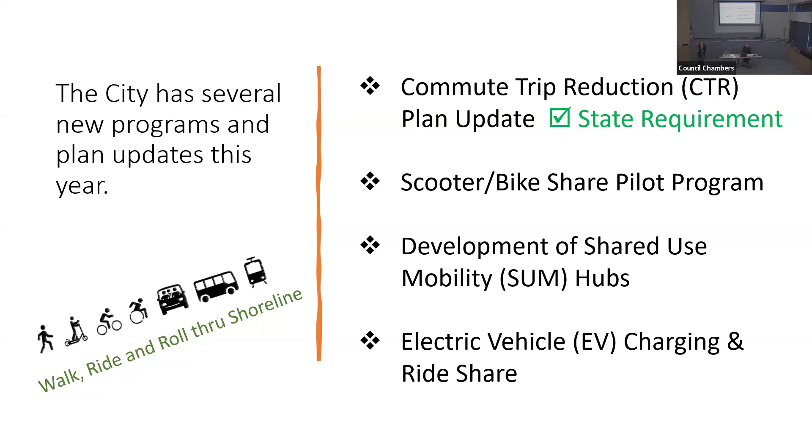We're going to have an open house, I'm going to say this more than once, on June 29th. So that's a save the date, there'll be a slide on that at the end. We're going to have a survey, and we'll have a number of other events and activities that Jeff will be talking about. So I'm going to move into commute trip reduction.

In 1991, we created a state law that was really focused on our employers and encouraging them to have people think about other ways to get to work besides driving alone. This was looking at ways to help with air quality, traffic congestion, and the reduction of petroleum fuels.

Next slide. In the city of Shoreline we have 7 employers with over 100 employees that come to work between 8 and 5, basically. Initially this was really focused on those sites, which are listed here, but they've just updated it and they're now expanding that, so they're asking for even more community involvement.

What could you do? What could we do to help incentivize the city of Shoreline, as well as these employers and others, to provide you with some enticing options besides driving your car alone? There's a survey that we're going to be talking about here in a minute to help encourage getting ideas about what we can do to support that.

Next slide. So right now, our employers, some of them have programs like ORCA cards to support riding the bus or rail. There are options for encouraging carpooling, van pooling, as well as riding your bike or walking. COVID has actually helped a lot with compressed work weeks. We're talking to these employers right now and finding out, do you have showers? Are there bike racks or other things that we could be doing to help encourage that?

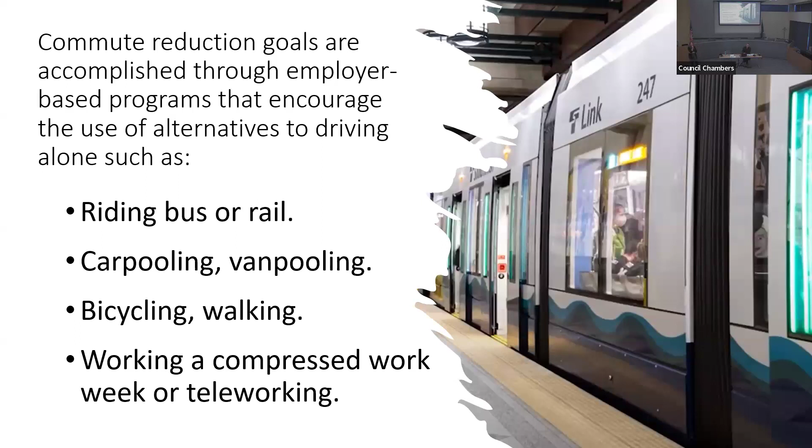Next slide. I think what we're doing in terms of the state asking us to look beyond our 7 employers is for individuals, for residents: what can we do to help look for other things besides driving your car by yourself, because it's not only a benefit for the environment, but it's a benefit for your wallet, it's a benefit for your health. So we call that a triple win, and that's something we'll be trying to promote more. The goal of this program is to have at least 4 out of every 10 commutes by means other than driving alone. We've already done the easy things.

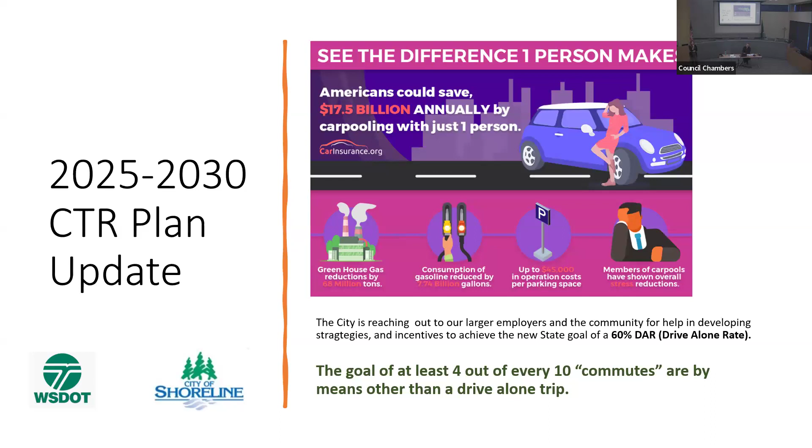So what other things can you help us think of that could help people consider something that isn't as comfortable and convenient as driving by yourself? What are things we could be doing that would help you consider an option that's good for our environment, better for your health, and helps your wallet?

These are goals that also support our climate action plan, which we as a council identified as a climate emergency about a year ago. So the importance of helping people shift from driving alone is being emphasized by our city leadership as well, and we're required to do CTR at affected work sites.

You'll see this QR code advertised on campaign signs we'll be putting around, as well as on our website and other areas. We have a survey that should go live by the end of the month asking the questions I just asked, focused on driving alone and how to look for incentives to consider other options. We also have the June 29th open house date. I think that's it for Commute Trip Reduction.

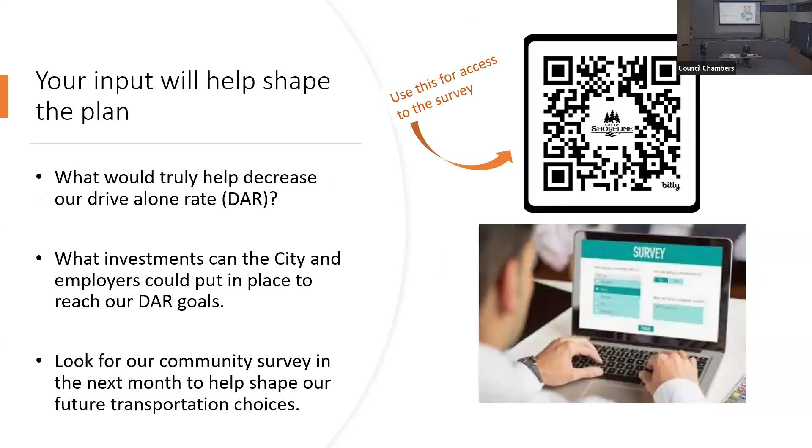I'll turn it over to Jeff to talk about our bike and scooter share. Along with the focus on reducing trips, we want to expand as many travel options as possible in the city.

Light rail is coming to the city, and we're expanding the various travel options we want to test out, one of which is scooter and bike share. If you're not familiar with this, you can rent scooters and bikes by the minute using a smartphone app. There are other ways to rent as well, by phone or online. It's about $6 for a 10-minute ride, but there are discounted rides for those on government assistance.

They need to be parked away from streets and sidewalks, in areas like the landscape strip between the sidewalk and the street, or other areas that don't obstruct people. We're guiding it so that busy areas will have specific designated parking places as much as we can.

We intend to launch this pilot this summer, test it out, and see if it's safe, easily accessed by the community, and actually expands travel options. People are using it to get to transit, to get to work, and for other trips.

There are a number of operators nationally, with three still operating in Seattle: Lime, the green and white bikes; Bird, the blue and gray scooter; and Veo Ride, another option in the Seattle area. We want it to expand from Seattle into our city, but not the full expansion as part of the pilot. So we're capping the amount allowed into the city and observing over the two-year period whether we can expand.

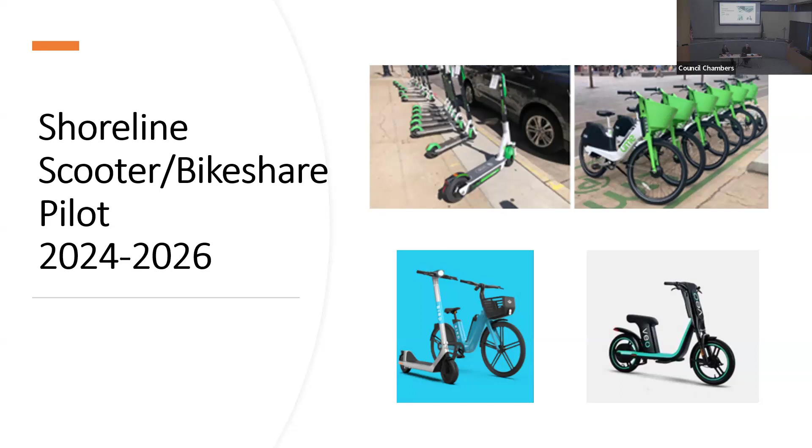This supports broader city goals to reduce greenhouse gases and fulfill the goals of our climate action plan, as well as transportation policies in our comprehensive plan to expand ways to get around.

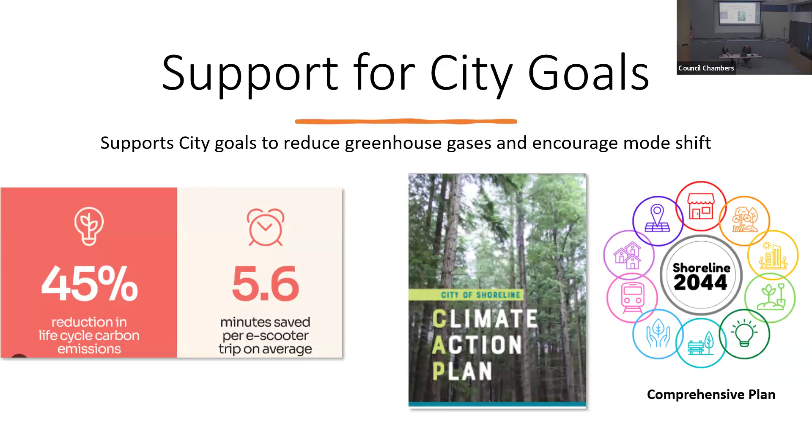The schedule: we are kicking it off now. We're updating the city codes around it to guide what these operators can do and how riders interact with our street network. We're selecting a vendor in the May through June timeframe, and we intend to launch this pilot service in July, possibly into August, timed for the light rail station openings to ensure additional access to the stations.

The two-year pilot allows us to have enough data to inform any future investment, really investigate what works and what does not, and explore whether it's actually expanding travel options for the city. It's based on direction from our city leadership, our city council, and we're working with a number of stakeholders, including police and fire and others at the city beyond just our transportation services division, and of course, the public.

We want it to be informed by the survey that's being launched. We intend to go out to the community with summer events in June and July in particular, and have some focus groups in different languages engaged around the Walk, Ride, Roll campaign. There will be regular review for safety and community response, making sure the operator is responding to any concerns the community has as it goes forward, and other considerations.

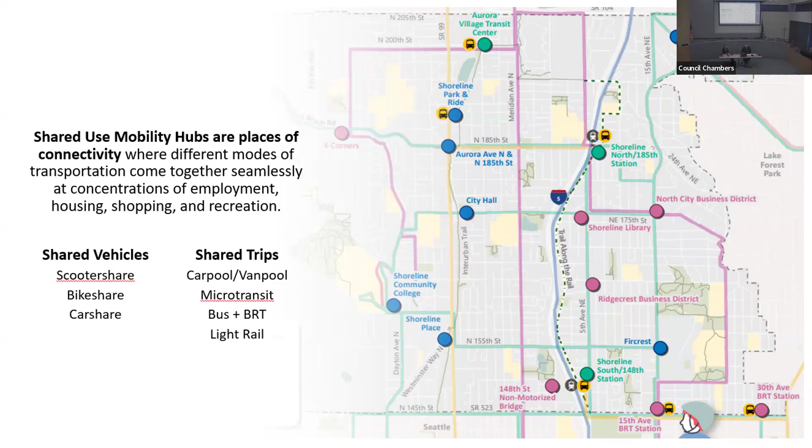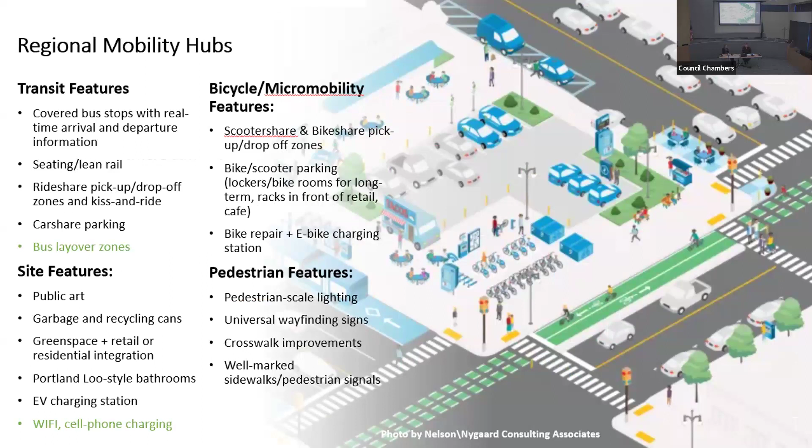We're actually advancing some concepts for this with the community this summer as part of this initiative, and we look forward to input on it.

Thanks so much. So as Natasha was indicating, save the date. We intend to launch the survey—maybe it isn't next week, maybe you're right, maybe it's a tad bit later.

In May, we're engaging online regarding these mobility hubs we described. On June 29th, we hope to have an exciting event with an electric vehicle car share operator coming to Shoreline, at the Town and Country and the YMCA, along with the operator selected for the scooter and bike share, to discuss this program of travel options and ways to reduce drive-alone trips in the city.

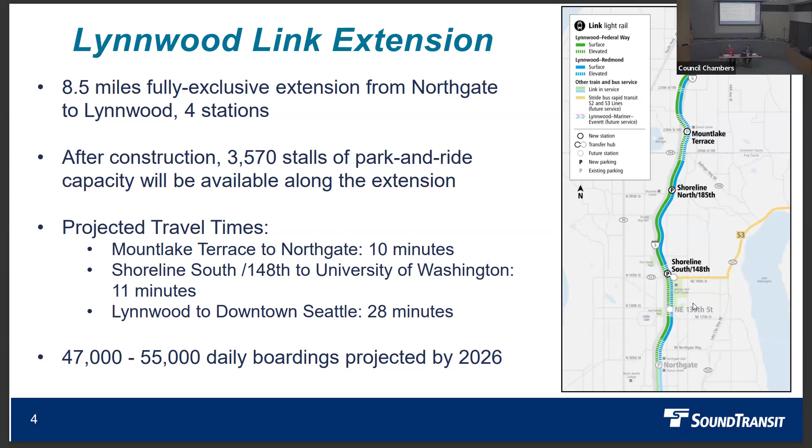One thing I'll highlight here is that we're going to have parking on this line. This isn't always the case on some of these projects, so you'll see parking at every single one of these stations. I know not everyone's going to get there by bus or by bike, and we recognize there are going to be people who want to drive. So there will be parking at each of these, and I'll talk about those a little bit.

I'm going to talk just about the two stations, and then I think Juniper will probably go into more detail, so I'll do the high level. If you look here on the left, you'll see an aerial rendering - this is one of the first sketches we did long ago showing what the station would look like. To the right, you'll see this aerial photo taken last summer. If you look at it today, it's basically done, and that's really exciting because it's going to be open very soon.

As you can see, this parking structure here - that's a new parking garage that'll supply 500 spaces at the station. You'll see here the bus loop where people will get dropped off by the bus, and then the platform is right there adjacent to the freeway.

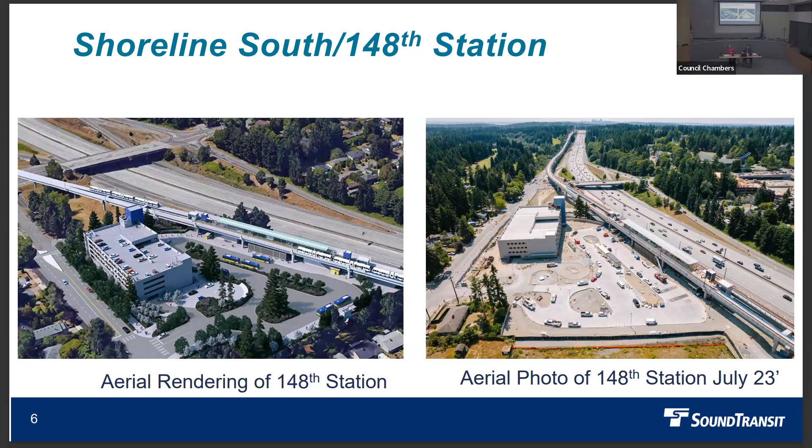Here's the next station, moving to Shoreline North at 185th. You can see the rendering of the platform there. This is at grade, but separated from the road. On the right you can see a picture we took on Monday just to see how far it's really come. Those cones are there just to keep people out of harm's way, but we're wrapping everything up. This station will also have 500 parking stalls.

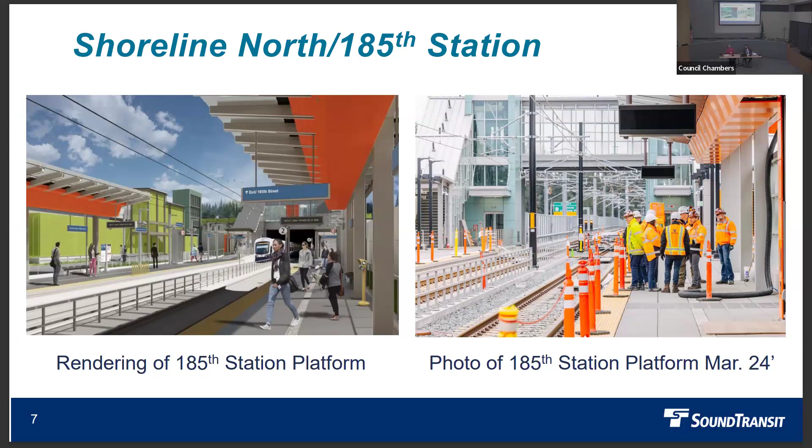I'll let you talk about the 148th pedestrian bridge - that's at 148th, sorry. So one thing I want to talk about with this group is rider safety. I think when I talk to the community, especially my own neighbors, safety comes up a lot. What exactly are you doing at Sound Transit to make it safe?

COVID changed how people rode and used public transit. We had to pivot and figure out what this looks like going forward. So we've made changes - we brought on 4 different security contracts last year to address all facets of the stations, because it's not as simple as if we have a nuisance at a station, we kick you off into the city and that's it. We have to make sure we're working with our partners, making sure people are safe getting to and from that light rail station.

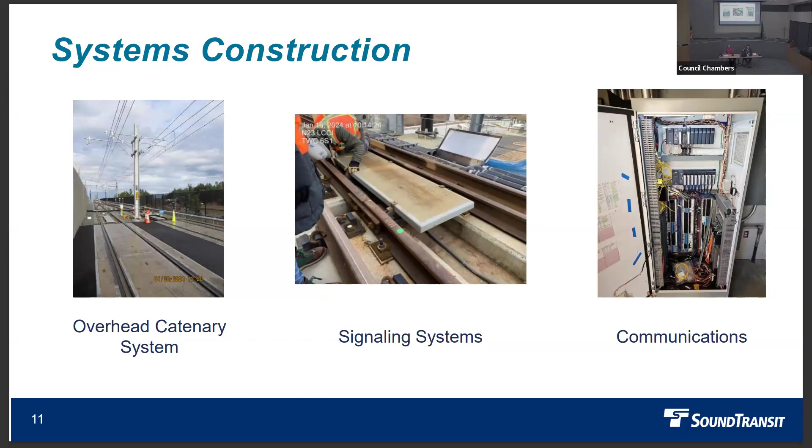As that work is being done, you'll start to see trains, and people say, how come we're not open? How come there's trains? Well, it's because we have to test for safety. I tried so hard, and I should have talked to Juniper about this, to get some pictures of the trains on the tracks here in Shoreline. Yeah, I think I have one too.

Unfortunately, I have to show you trains from up north at Mountlake Terrace. These were taken back in November, some of the first trains we put on the track. You see unpowered car clearance tow on the left, and you can see the truck up there if you kind of squint. Essentially what we do is take the tow vehicle, then take the light rail vehicle, and look for clearance issues. On the right is one of the first test cars we had out there on its own, and there will be a lot more of that between now and then.

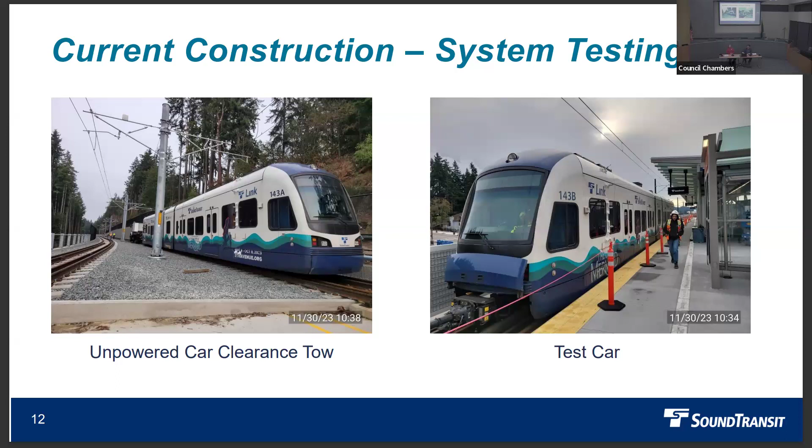We've been doing a lot of night testing over the past two months, really just to catch things you can't see in the day, whether it's sparks on the tracks or other things. Over the next couple of months, it's going to be trains on the tracks, and you'll see simulated revenue service, so it looks like there's actually trains going.

So I've talked a little bit about that. I think upcoming activities between now and revenue service will mainly focus on testing and certification, making sure our drivers understand the new alignment and know how to navigate it. There's real people that operate these things, and it's very important that they keep you safe.

In the next week or two, we will have a revenue service date for the public. We've been saying late summer, early fall, and that's tracking with what we're expecting. A huge shout out to all our partners for getting us to this point. It's a reality, and I couldn't be more excited about it.

So I've taken up too much time, so I'm going to get through this quickly. I'm going to talk about the transit connections between our partners. Sound Transit doesn't operate the service you're on if you're taking King County Metro or a Community Transit bus. That often gets lost on folks, but it's important that we work together to make that system as seamless as possible. If we don't, your ride isn't good.

I want you to be able to get on a bus in Everett and get to a light rail station in Snohomish County, and have it feel like one service. In order to do that, we have to work constantly and for long amounts of time with our partners. This is a slide that I hope can go out to the group, because the link on the bottom left opens up a map that shows the plans King County Metro has put in place to work with our system when it comes online later this fall.

The 333 and 348 buses, that some of us here in Shoreline would use, get tweaked around here, and the whole purpose of that is to get you east and west to the light rail stations. I think if most people have to get on more than one bus, say a 3-seat ride, they may not ride. What that means is if you have to get from one bus to another, it makes it a lot harder. So we've worked over the past year with our partners to make sure we're ensuring better connections.

The mention of scooters is a really good point, because there will be times when someone doesn't catch a bus and just wants to pay $6 to get across town. I've done it, and it's super helpful when you need it. Community Transit, I'll just point out, both of these have been great partners, but the blue line will eventually connect to the North 185th station.

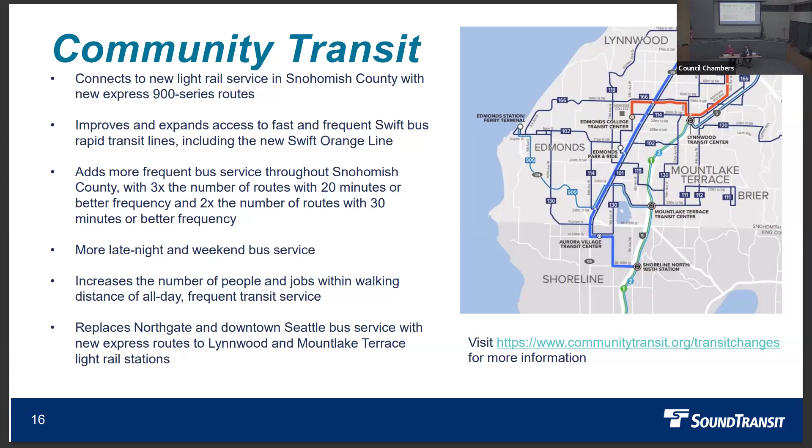That's a huge deal, because then all the people that are up here will be able to come down south and not terminate at Aurora Village, but actually get to the light rail station when that opens. Coming down the pike after this, we've got Stride Bus Rapid Transit coming online. I'm sure we'll come back to the council to talk about it at some point. Essentially, that'll be a Bothell to Shoreline connection to the light rail station, providing north of the lake a really fast and efficient ride.

So with that, I'm going to pass things over to Juniper, and then we'll get into some questions after.

I do have an online question for you before you go, if that's all right. Is security really working? I've seen them talk to people, but not put them off the train. What's your experience with that?

Well, I think security has a really hard job. I don't know if anyone in this room could do that job. It's extremely difficult. They have to assess threats, assess any situation. If I text and say somebody looks funny, that doesn't necessarily mean they can remove someone from a train. I think it's working in the sense that people are there, and the number works. So hopefully, if you have an experience where security doesn't step up, let Sound Transit know. Let us know how we can do better. This is not something we do in a vacuum, so it's really important that we work together. Hope that answers your question.

It does. And one other one that's just come in, and I think Juniper will answer this. Curious if there's anyone there tonight who can speak to when 5th Avenue Northeast, just south of 145th in Seattle, will open back up to car traffic. You mean at 5th Avenue at 185th or 145th? 145th. Okay, yes, I can answer that. I will get to it a little later.

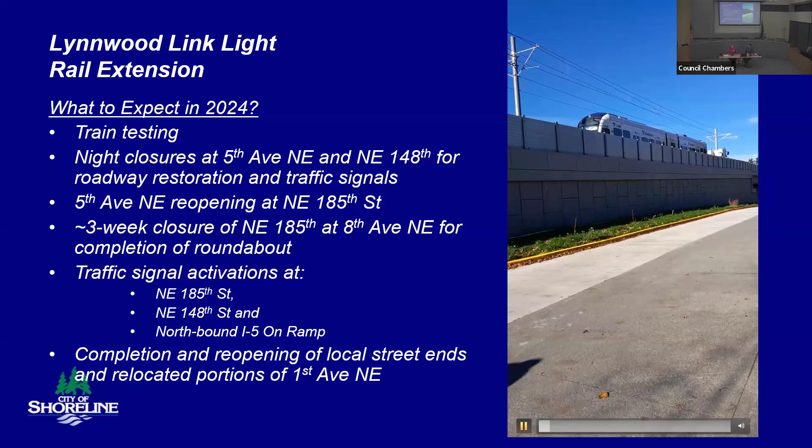I squealed. This is standing at 155th, at the fire station on 155th, watching one of the dead tow tests happen, where they're making sure that the track is clear enough. I'll just run that one more time. The trains are there. It's so exciting.

As the online person asked, 5th Avenue south of Shoreline has been closed to southbound traffic. It will stay closed to southbound traffic. It will not be reopening for southbound travel. What will be built, a combination of the 130th station and the interchange project, will be new bike ped facilities that will take up what the southbound lane had before.

Northbound traffic from further south, from the 130th station, I believe, will reopen, but I can look to Natasha or Eric to confirm. From 130th up to 145th, northbound will reopen, won't it? From Northgate, Jennifer? Yes. Yes, it will eventually reopen northbound after the interchange is done, right? Okay, and the 130th station.

In terms of right here in Shoreline, there are, starting tonight, some periodic nightly closures of Fifth Avenue in front of the Shoreline South 148 station. That's for them to finish reconfiguring and building new islands in Fifth Avenue for two new signals. There'll be one at 148, at the entrance to the station, and there'll be one at the northbound on-ramp as part of the interchange. Those will be timed so they work together.

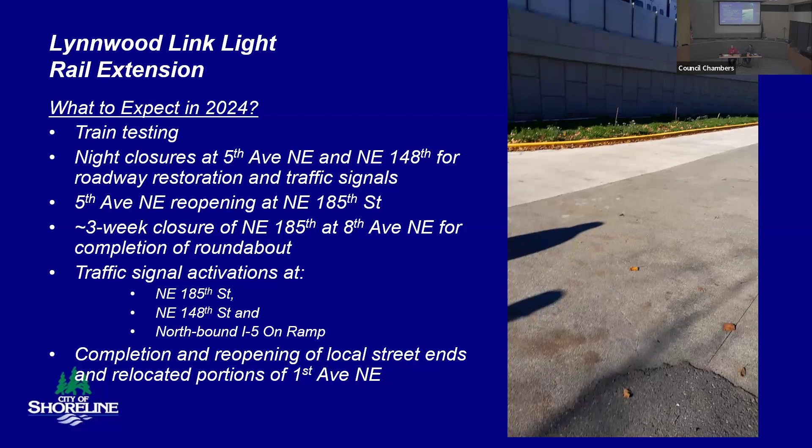There will be another signal at 185th and 5th, where again the buses will be going into the top of the parking garage where the transit loop is going to be located. Those signals will come online probably in the next two months, probably April is when I would expect to see those come online. They're working feverishly to finish all the street ends and portions of street that have been closed in our local neighborhoods, and those as well will be finishing up in March and April and reopening to the public.

All right, I'm gonna step through a bunch of those new sidewalks and street ends just to highlight the bits and pieces that Sound Transit had to build that our capital improvement program and long-term non-motorized transportation planning will eventually connect together into longer trails.

There's a main entrance on the south end there into both the north and south platforms because the train tracks are in the middle of the platforms. If you're getting off a bus, you can go over a bridge from the north end of the transit loop to the north end of the platforms and get down. There's an overcrossing so you can get down to either the north or southbound platforms easily.

Moving on to the Shoreline North Station, we're looking south at both platforms from the middle of the tracks in that photo there. On the left, it's a little hard to see, there's a yellow arrow on the outside there. They're building 14-foot sidewalks on 185th and 8th.

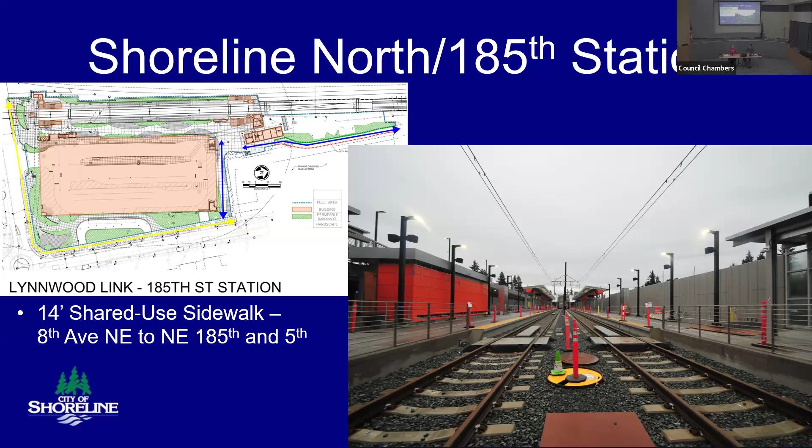Trail along the rail is a vision that the city has for a 2.5-mile stretch of trail, a lot like the interurban trail, but parallel to the train tracks, roughly speaking.

Where Sound Transit had to build new sidewalks as they rebuilt or touched our roadways, we negotiated to have them build shared use paths and extend it as long as we could in a number of places. This is on our website under Trail Along the Rail, or in the presentation if it's made available later.

The green and white checked locations with the numbers on them are where Sound Transit is building short segments of shared use path. A little bit more work for Jeff and Natasha to get funding in order to do master planning for the rest of it, and stitch together the pieces that Sound Transit's built.

Working with Sound Transit to negotiate some trades of street ends for easements for trail in spaces where it's got to be free of trees anyway, so there's no risk of trees falling on those overhead catenary lines that he mentioned. So it becomes a real nice space to put a trail through. We're negotiating now for some of those easements that we'll need to eventually build the rest of the trail on.

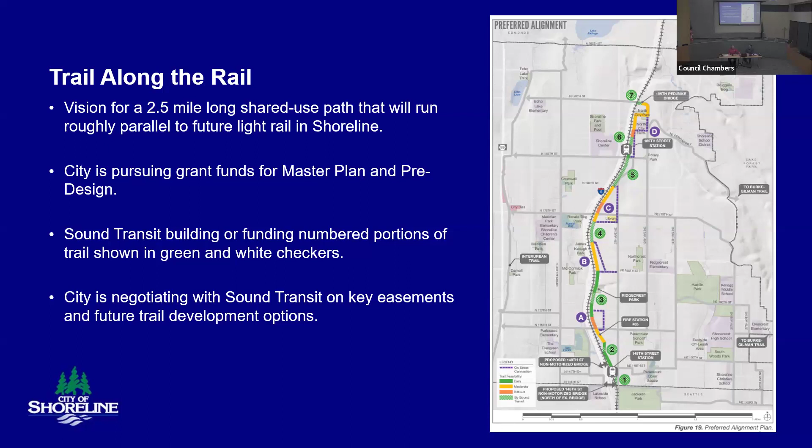It connects to a few bits of sidewalk that Sound Transit had to build on 5th. But it also connects to sidewalks that were built half with money from Sound Transit to improve access within a quarter mile of the stations, and half with other funds that I'm sure Natasha had a hand in getting grants and resources for. And so there you can get from 180th, you can go out to the street in bike lanes or walk down the sidewalks all the way to 175th.

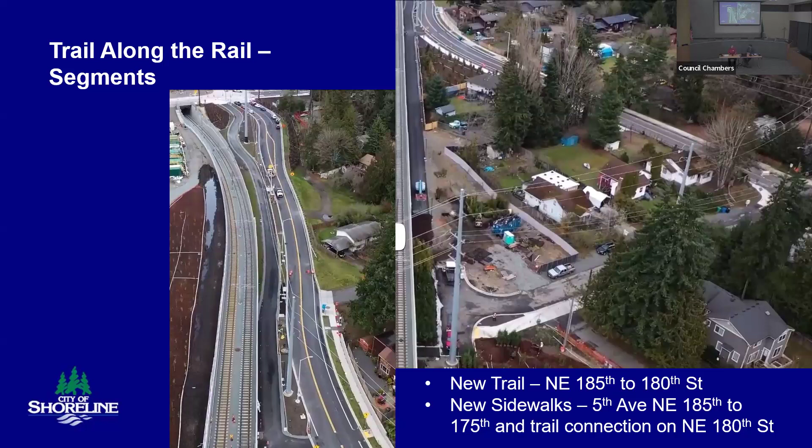10 blocks complete. There's more trail that we want to do parallel to the tracks between 180th and 175th, but that's a future looking project to work on. You can see in the right-hand photo, going off to the right into the tree is a 10-foot sidewalk that was built to connect the end of the trail out to 5th Avenue at 180th.

Ridgecrest Park, I heard at least one person mentioning it's closed right now. This is one of 2 parks that were significantly impacted by the light rail project, but Sound Transit doesn't have the park closed right now. The city does. It is one of the park bond projects funded by the residents here in Shoreline.

In the next photo, I'm going to point real quick. On the left is before. We had a gravel parking lot, old drinking fountain, ball field, and racquetball courts. This is during construction. Sound Transit had to replace the gravel parking lot with new parking stalls, and they had to replace land that they were acquiring for the tracks with new land for that parking lot. So the park actually got about 7,000 square feet bigger.

So no overall net loss for the city in that regard. Right now you can see a bunch of cars and trailers parked on that parking lot. The city is improving the access into the park. The racquetball courts are staying. In the background there, you can see the beginnings of the fence for the dog park.

Sound Transit still has to put in a new sign identifying the park, a new drinking fountain that will have a little doggy bowl attached, and they're going to finish landscaping here.

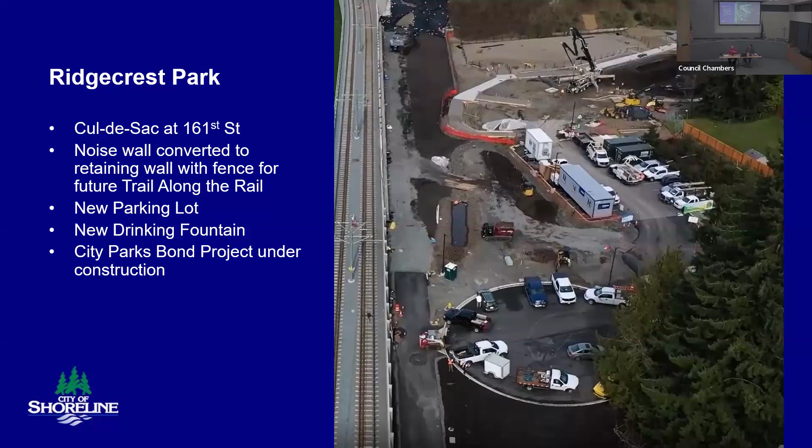161st turned into a cul-de-sac. It is no longer a through street down to 159th or 158th. Instead we've got a shared use path only, making that connection south. This is looking from the right-hand side, from about 159th up towards the cul-de-sac at the top, and Ridgecrest Park is just there in the distance. So we've got about 2 blocks worth of trail in that segment, and preparation for extending it further.

On the left is a segment of shared use asphalt path along First Avenue from 174th near the library down to mid-block about where 173rd or 172nd would come through. But there is new right-of-way land available for the city to extend that down, and it would wiggle away from the tracks at 170th and eventually come back in closer.

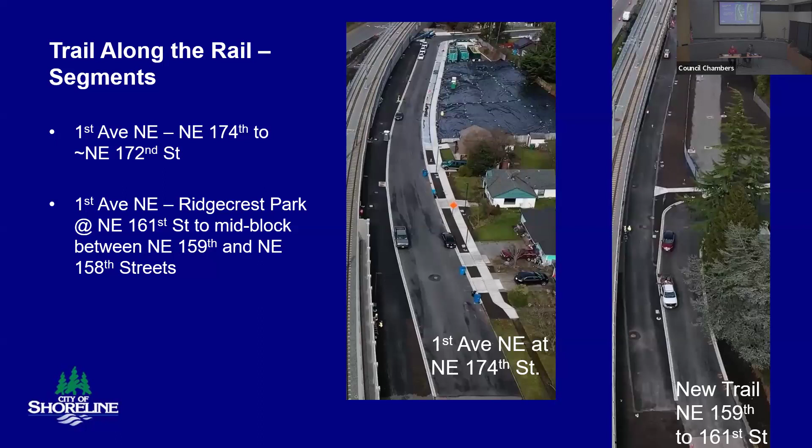There's also a narrower path that goes from the station site to 149th, and there's a couple of developments already in the permitting stages for 149th Street.

Okay, that is good to know. Let me see. Oh, that is not what I wanted to do. That's okay though. Oh okay, pointer, how do I do that? Okay, I could also do this. Which button is it? The top. Very, very top button. Okay, let me go back a slide. Hang on, this way. There we go.

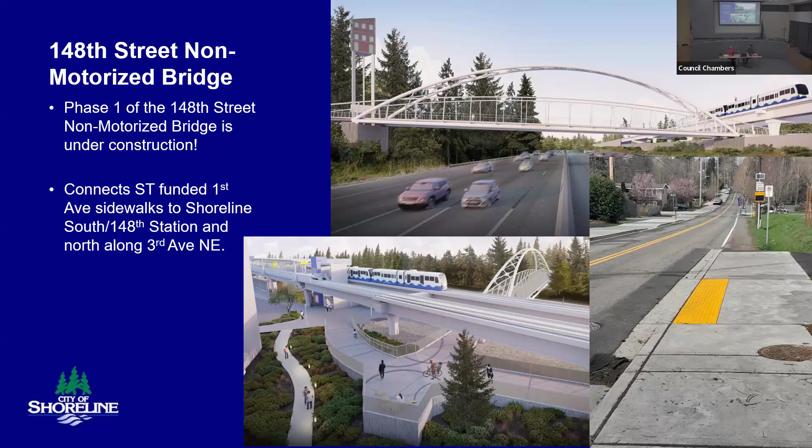Here's a rendering of the bridge and the trails I was pointing at in yellow. This one goes from the station site down to 149th, and the bigger one goes out to the bridge, across and north up to 151st, 152nd, and eventually to 155th. On the right is a photo of sidewalks the city built, again with access funds from the light rail project, to make it safer to get down First Avenue on the west side of I-5. This wide tactile strip is the crosswalk where the bridge will come out on the west side of I-5, connecting to those sidewalks and connecting the east and west.

Moving a little further south, this is the South Station site. March 5th is when this picture was taken, from the south instead of the north that Eric had. On the right is where those two trails come in from 149th and from the bridge further north. Blue arrows show the routes into the station from 5th Avenue, with a shared-use 14-foot wide path. Going north from here, it transitions into bike lanes. The interchange project picks up at that northbound on-ramp intersection and will continue the 14-foot sidewalk on the west side of 5th to 145th. Bike-ped facilities on 5th Avenue will continue south to Northgate once the 130th station and the city's interchange project are done.

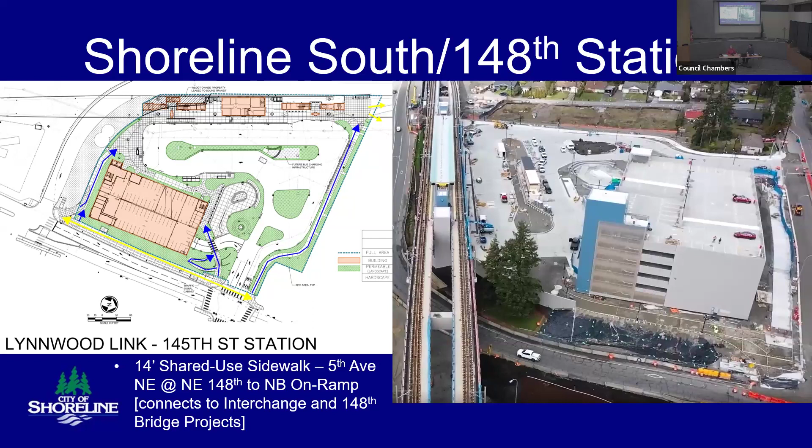The interchange project - I hope you've all heard about it - our contractor just mobilized last month to start work on the west side of I-5. It's two projects in one: building two roundabouts in lieu of the two signals at the 145th interchange from I-5, and doing the first segment over to First Avenue on the west side of I-5, building new sidewalks and improving traffic flow through that area.

It connects on the east side of the interchange into the improvements Sound Transit will build for the bus rapid transit Stride line, from Bothell, from 6th Avenue east of the interchange. That work kicks off in '26 or '27 for the BRT construction - the Green Line, I believe it's '27. Early work in '26, main construction of the new bus stops along 145th and up Bothell Way in 2027. That line will have a terminus at the Shoreline South 148th station.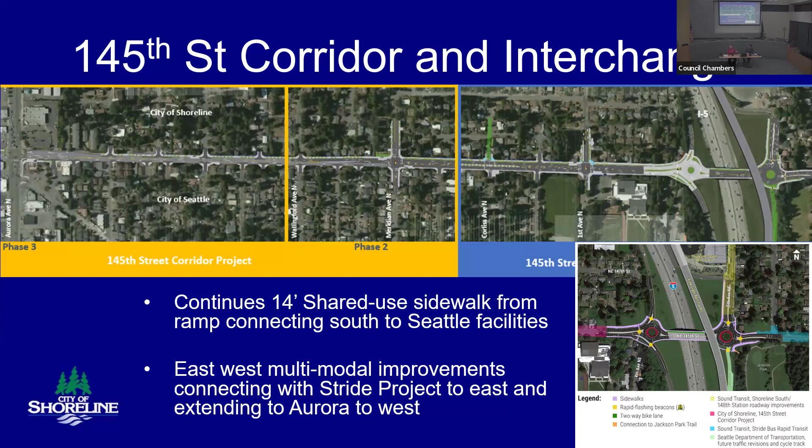You can see off to the left in the yellow areas, all the way out to Aurora, the city has plans for phase 2 and phase 3 of improving the 145th corridor. Some other time Jeff can tell you about the off-corridor bike networks we have planned for this area.

Cycling back to the beginning, Sound Transit did impact some wetlands and shoreline right next to the fire station - relatively low quality, isolated, without streams running through them. We were able to negotiate with Sound Transit, our surface water group, and our parks department to have the mitigation occur at Ronald Bog Park, on 175th.

If you get a chance to stop by, I strongly recommend it. There are some nice gravel paths there, lots of wildlife. There's a bus stop that features wildlife photography from a local resident of animals at Ronald Bog - otters, eagles getting ducklings occasionally, lots of other birds and wildlife.

And the artwork - there's a sculpture called The Kiss that has been shifted over, so it's a little more visible. There's an arboretum that the Rotary Club has there, with trees planted in memory of various members of that club as well.

It turned what was Japanese knotweed and blackberry into very functional, high quality wetlands. So we got, again, better than what we lost. In my opinion, the functions and values achieved here are incredible. It was also a very contaminated site - they pulled out debris and materials from what appeared to have been a gas station, including a bathroom sink and a toilet.

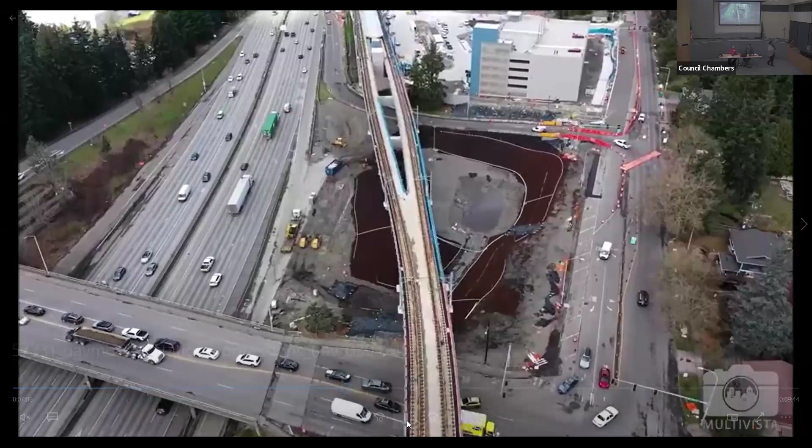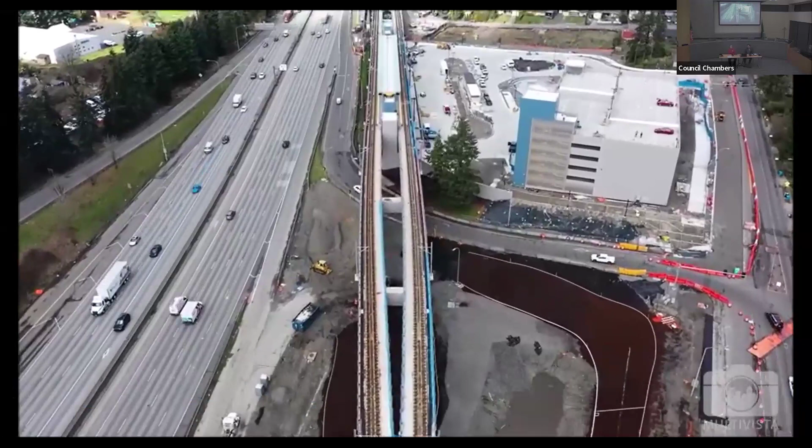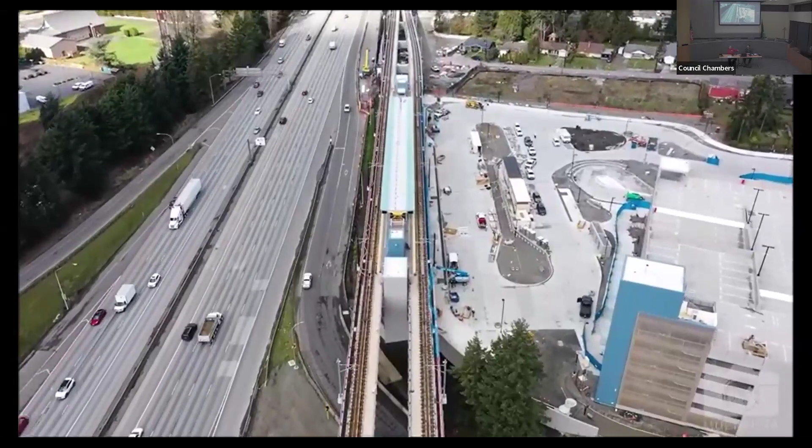So we just started at 145th. We're going over the Shoreline South 148th station site. On the left, you see a yellow crane that is building the piers for the 148th Ped Bridge. And off to the right, there's a vacant set of lots that is one of the transit oriented developments that had to delay because of the construction financing market that hopefully will pick up again soon. So the gray area in there will be...

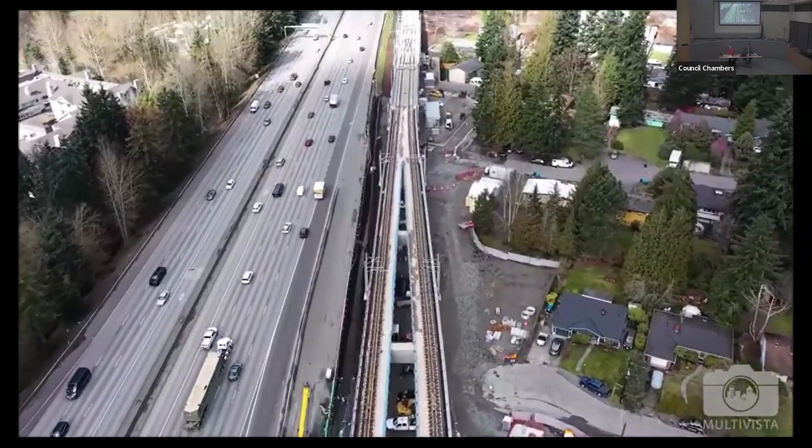The trails that connect the pedestrian bridge north and south through there. And you'll recognize a little bit of this. I did pull some screenshots along the way. Happy to answer questions.

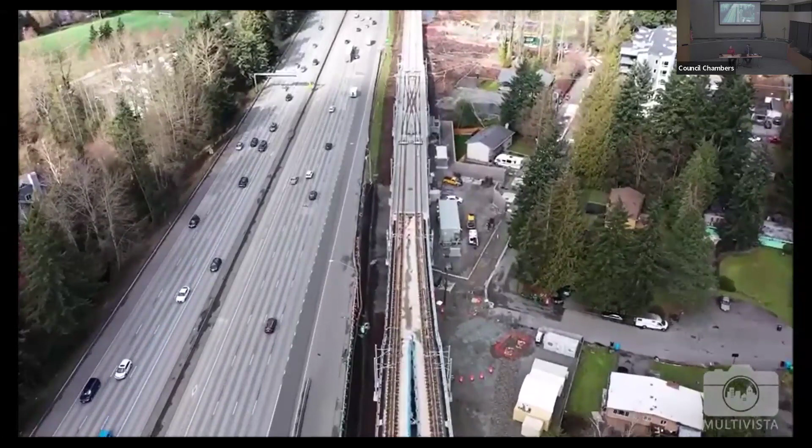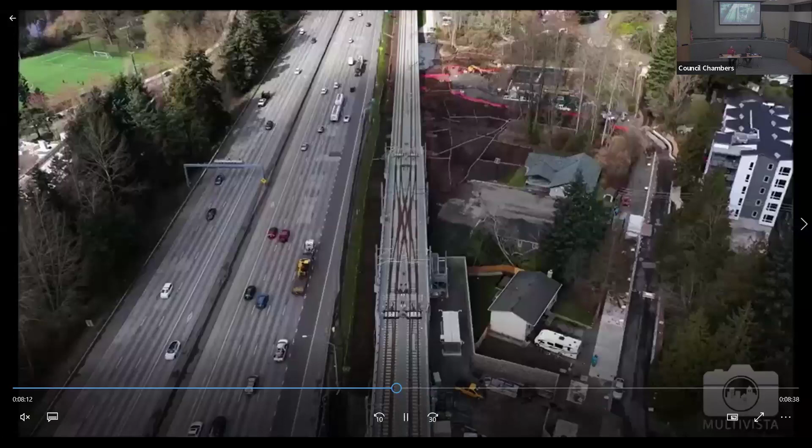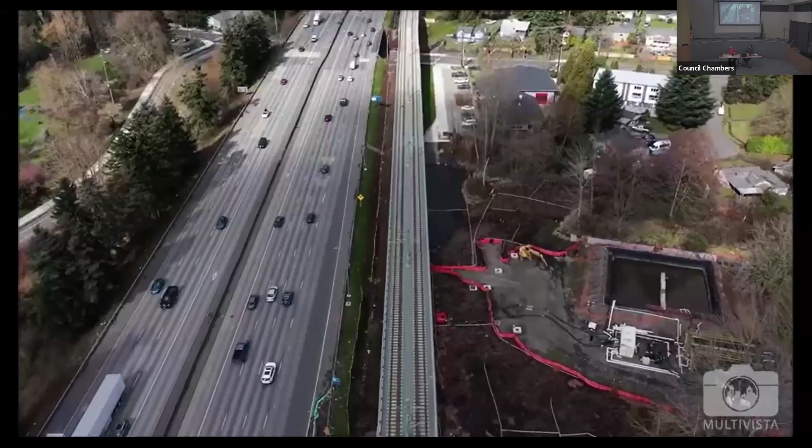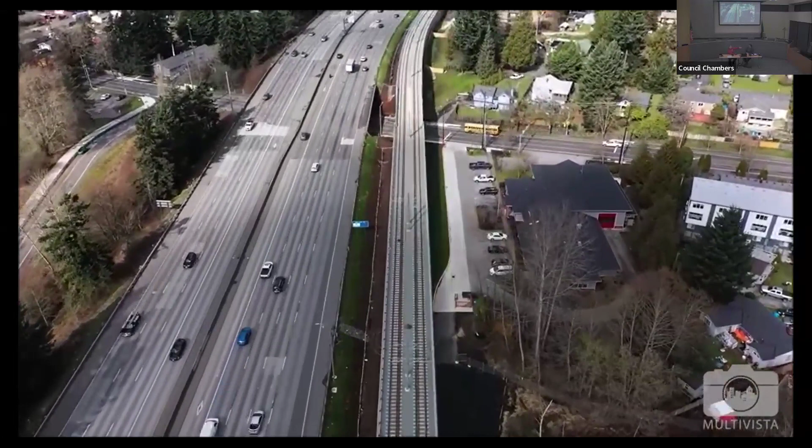The artist for the South Station, for those of you who may not remember from the open houses years ago, is a gentleman named Buster Simpson. He is a local Seattle area artist that loves to work with stormwater. So the artwork will bring the water from the roof of the garage through bright blue pipes that look kind of like industrial scaffolding out to these cairns made out of stormwater, like the things that normally go underground for stormwater are stacked. And at the south side of the garage, it'll run along the top of a retaining noise wall and drip down, and it's supposed to turn green and grow stuff.

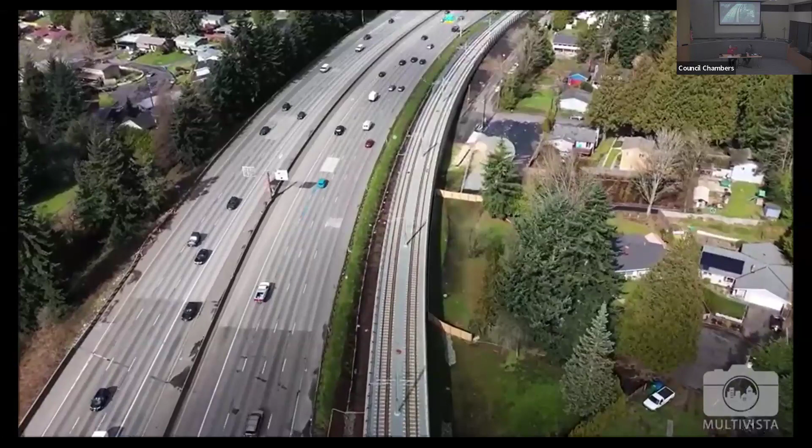That thing off the top that goes over the driveway - at the north end, there's one of those that goes across over the pickup drop-off loop to another cairn on the north end. On the south end, it goes over the pedestrian walkway. It doesn't quite come from the top, it comes out sort of from the middle. And on the south side of the building, there'll be a sundial as well.

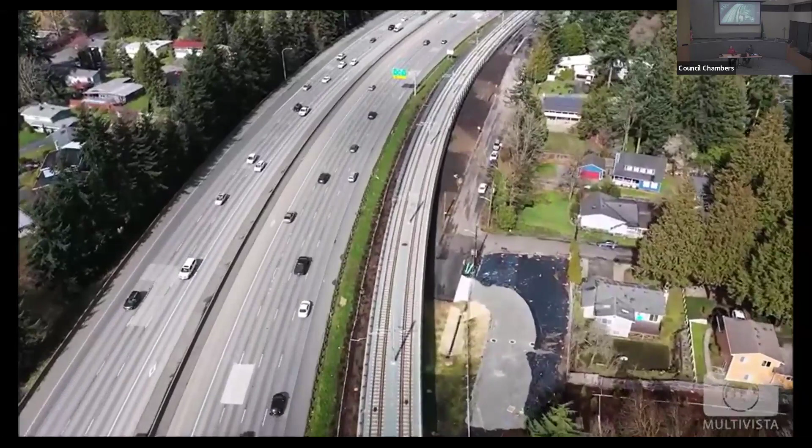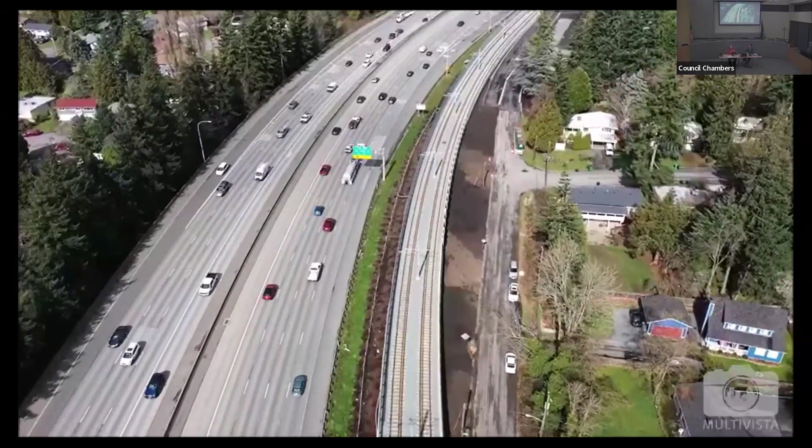The Shoreline North 185th Station site is from an Arizona-based artist named Mary Lucking. She's got metal weeds growing out of cracks and crevices, inspired by plants growing everywhere in the Northwest. Both stations also have a theme of evergreen trees for their landscape design. There's inlaid metal bands that mimic the shape of Doug fir at the north station site, and cedar at the south station site. Benches made to look like the needles, it's really abstract. The metal panels around the north garage are also pine needle inspired, or Doug fir needle inspired.

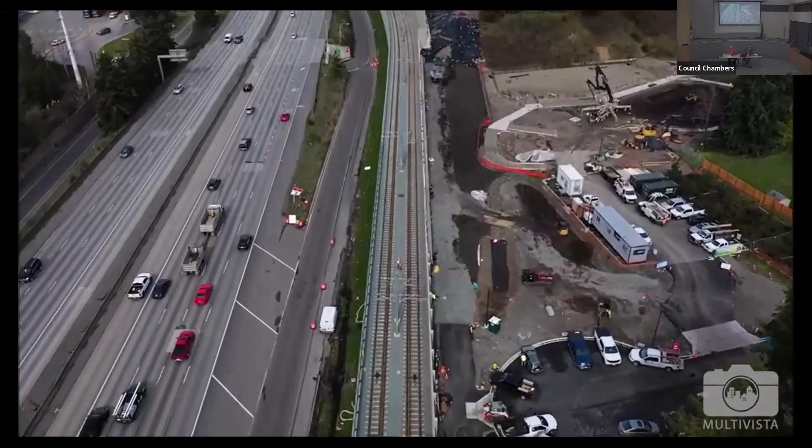We're getting to Ridgecrest Park here. And again, our city project is going full bore there on the right, and Sound Transit's putting down the landscape topsoil, and we'll be grass seeding fairly soon on the left.

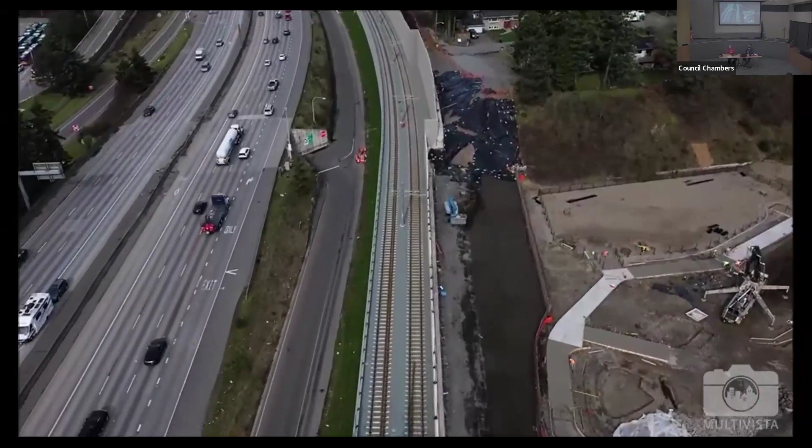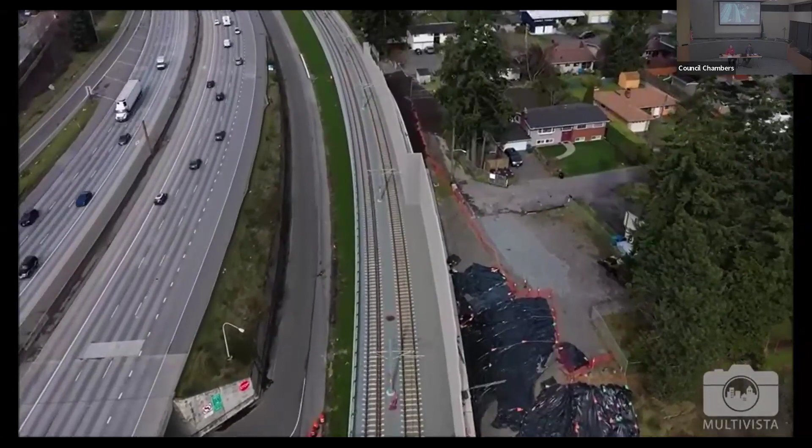What will your job be once this project is done? Excellent question. Shoreline's got me till the end of the year, and then I'll be figuring that out.

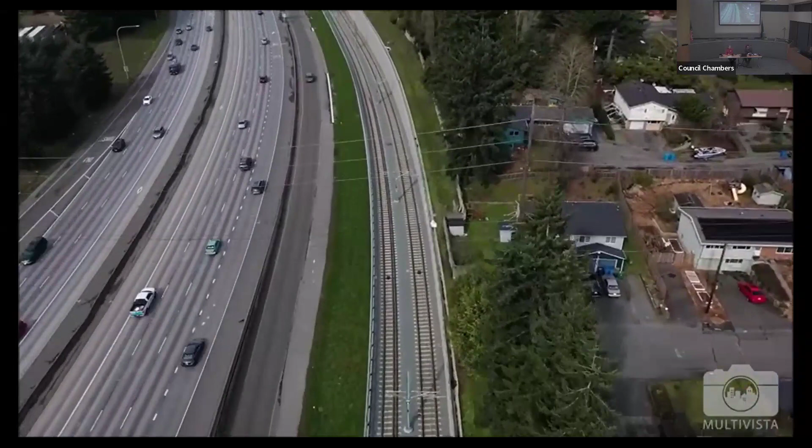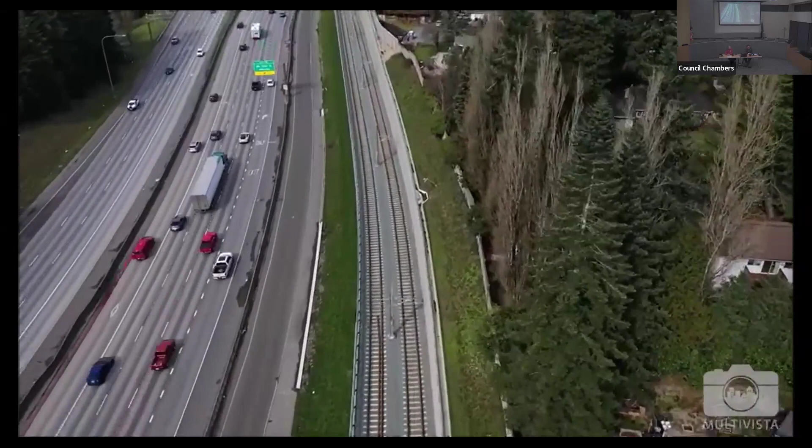There is a question online: Is there any sort of chance for a ride along during train testing over the new tracks? I know important people get to do it, but what about really excited local transit lovers? I love that question, and they're not the first person to ask it. Likely not, and it really comes down to safety. Today, both sites are still active construction. And even once they aren't, with the TCOs and what's in place in terms of safety and what the contractors have to do, we don't allow people on the site. That said, I'll be out there bright and early on that Saturday morning when we do open, and I would welcome everybody to join us.

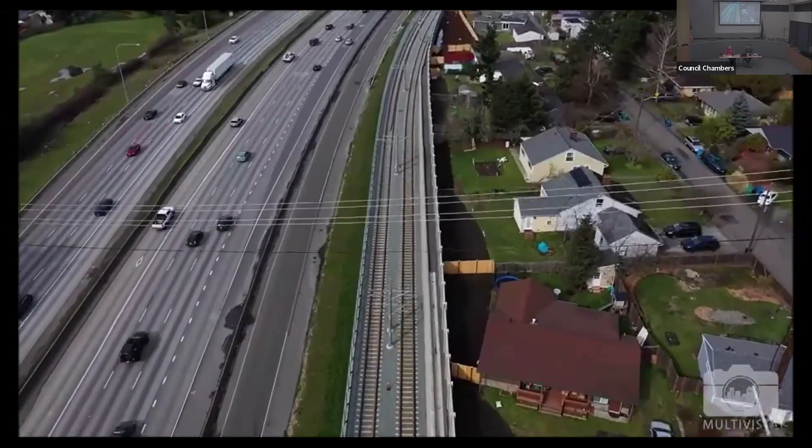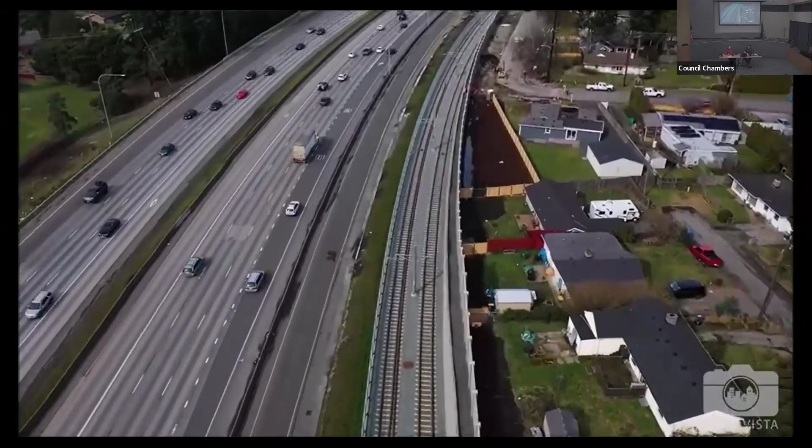I'm already working with the city and with our other jurisdictional partners in terms of what they want these opening day celebrations to look like at each of the stations. It should be a party, it should be a lot of fun. As I'm working on Eastlink right now and they're preparing for that, we've got Microsoft and Amazon helping them think about cool things we can do. I can't say what they're going to do, but it's awesome. And those folks still recognize, all the big businesses in the region realize that they have to support the one line too, because the one and the two line are going to be connected. This really will change the region. And so let's celebrate it.

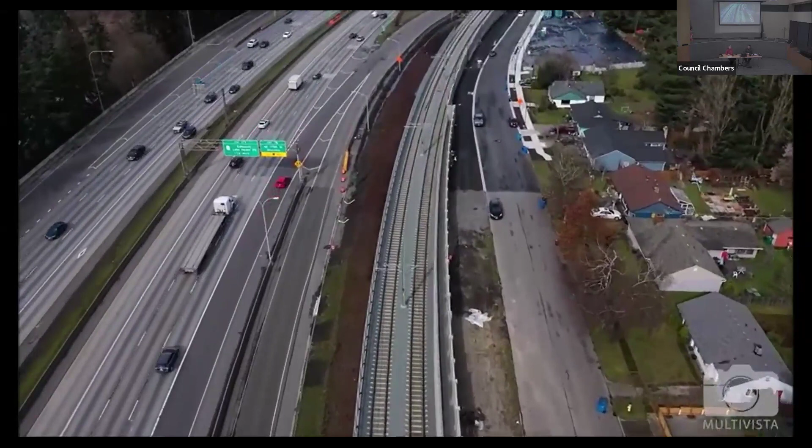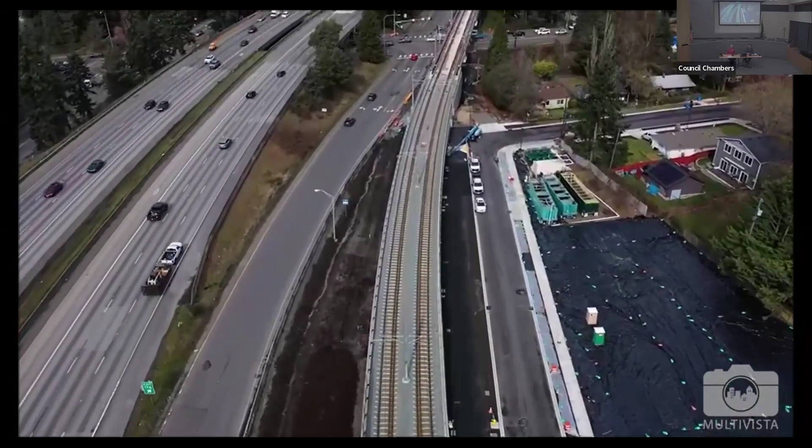Sorry, you said that's Saturday, September 7th? After July, before December. Yeah. We won't creep into winter though, unless you want to keep me employed for another year or two.

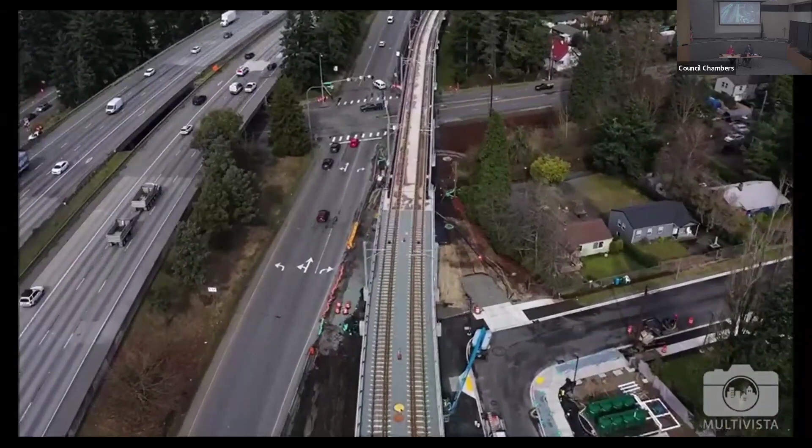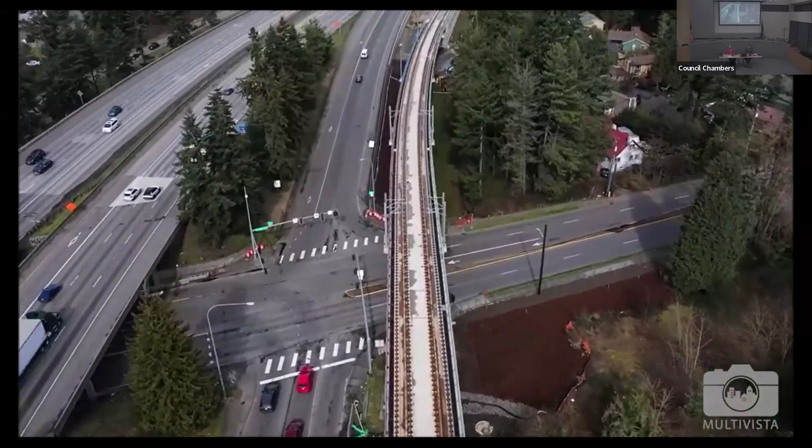Any other questions, comments? After July and before December, you're talking about Shoreline. So all 4 stations will open at once, at the same time. So you'll be able to get all the way from Lynnwood to Angle Lake. I should know these, okay, so let's see - if you were gonna go from Shoreline to University of Washington Station, it's, no, it's like short 13 minutes.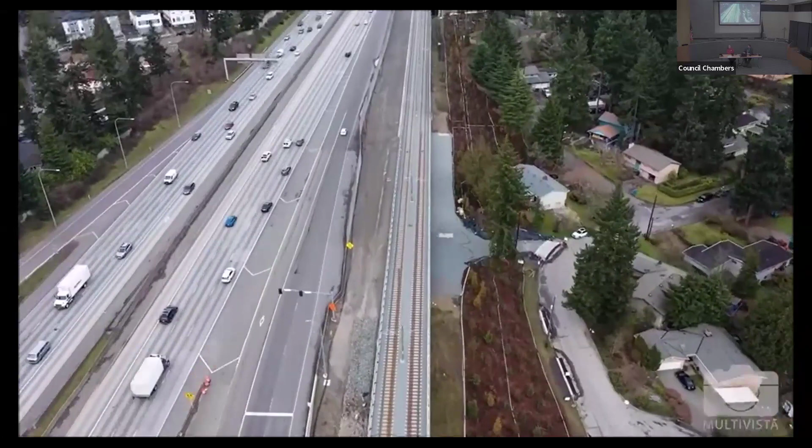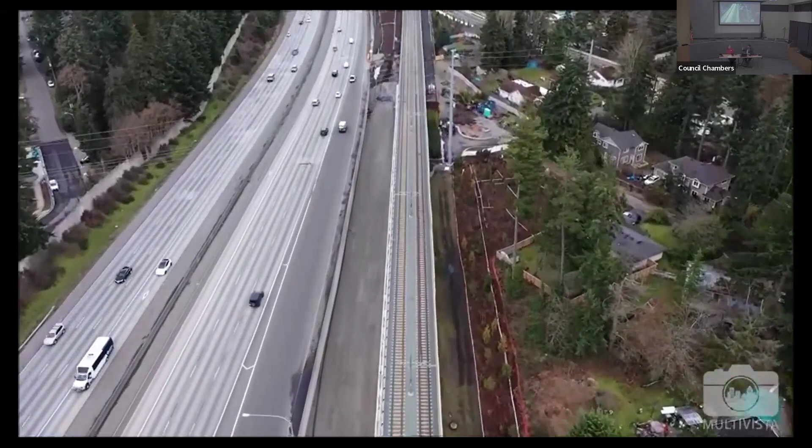The trip I know, Lynnwood to downtown Seattle, is pretty quick. When you look at Lynnwood to Federal Way, that trip becomes longer. What I had roughly was Shoreline South to downtown is 18 minutes, Shoreline South to University of Washington is 11 minutes, and Mountlake Terrace to Northgate is 10 minutes. So it really cuts down the time if you're trying to get somewhere.

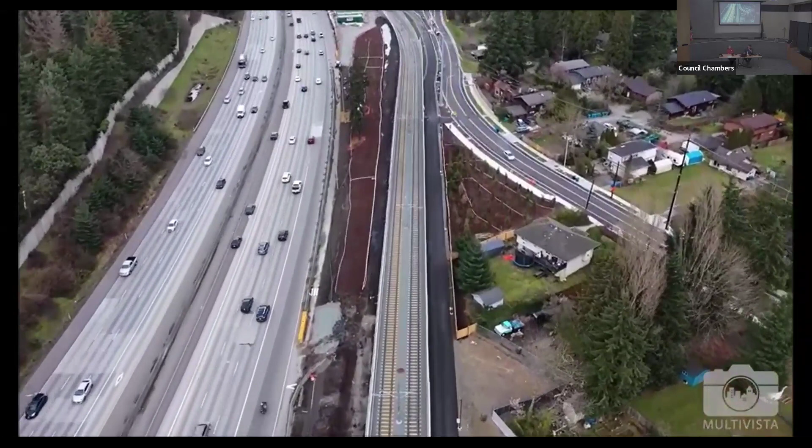What I'd suggest to people when it opens up is, sure, go to a game - the games are great for this - but if you have kids or want to go on a date, just pick a station, go there, walk, and see what you can do. I took my daughter for the first time: we went to University of Washington, got out, and walked to U Village. It was a mile walk with a 4-year-old. It wasn't great, but we had a blast, and I would have never done it had we not tried. Just be curious and explore a little bit, because that's where we really make this thing work.

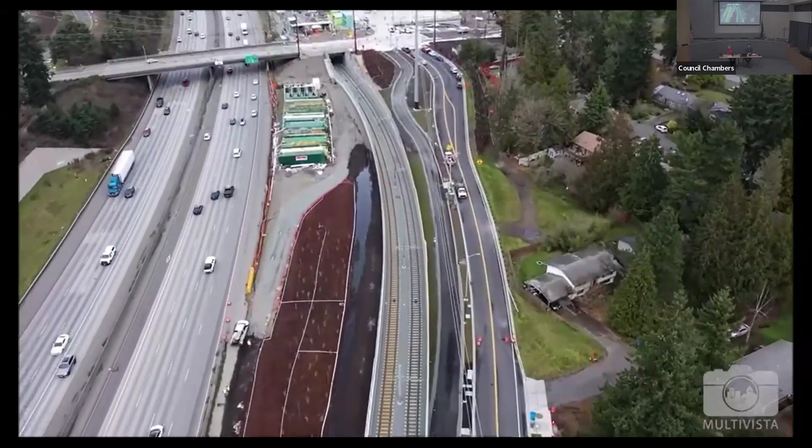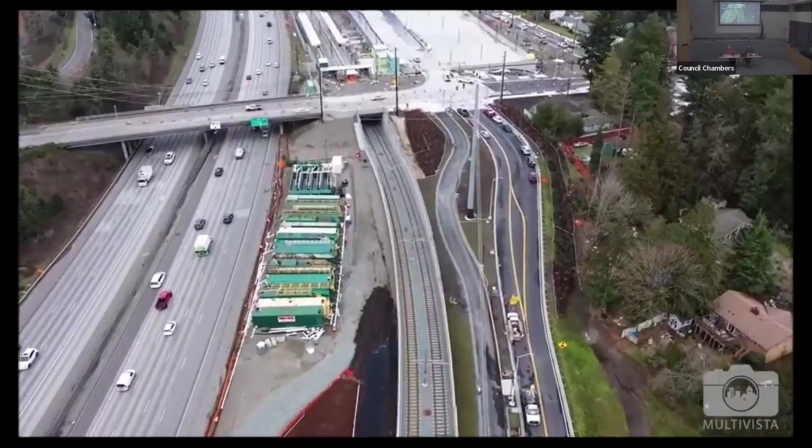Okay, so be curious. At Northgate Station, a whole bunch of parking just went away because new multifamily housing is going in on one of the lots that was being used for the light rail station. Any plans to replace the parking that's being lost?

Are you talking about the King County Metro parking there, the service lot? Yep.

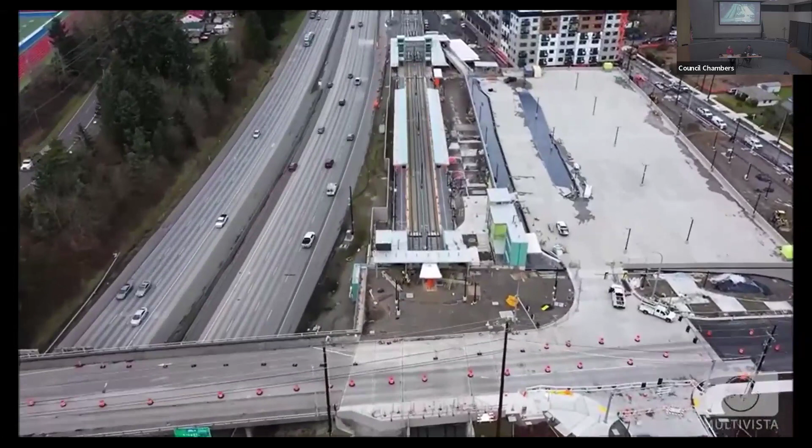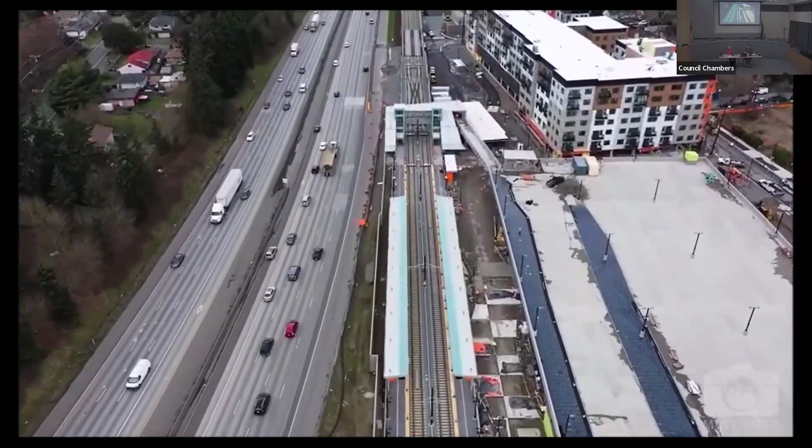Not to my knowledge. I think what we're focused on as an agency is working with partners to make sure there's more of those east-west connections. There's always going to be people that want to commute and just drive in the morning, park and leave, but we have to make it so our agencies are working together so it's easier to get to and from the stations. Because parking - we could build a 10-story parking garage at any of the stations and they'd be full. We've done that at Lynnwood: it's 4 stories, 1,600 spaces, 1,675. I guarantee you when that opens up, it will be full on those busy days.

This is the north end of the Shoreline North 185th station. There's that bridge from the transit loop over to the north end, and the Connect Shoreline building that'll have commercial space right down in this area. There's a trail that goes up to 189th. The trail along the rail would jog out along 8th there, around North City Elementary, and up to that 195th pedestrian bridge. Just to point things out.

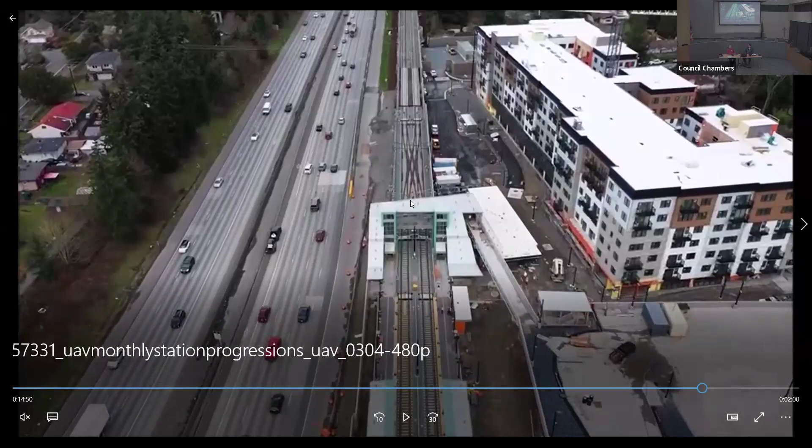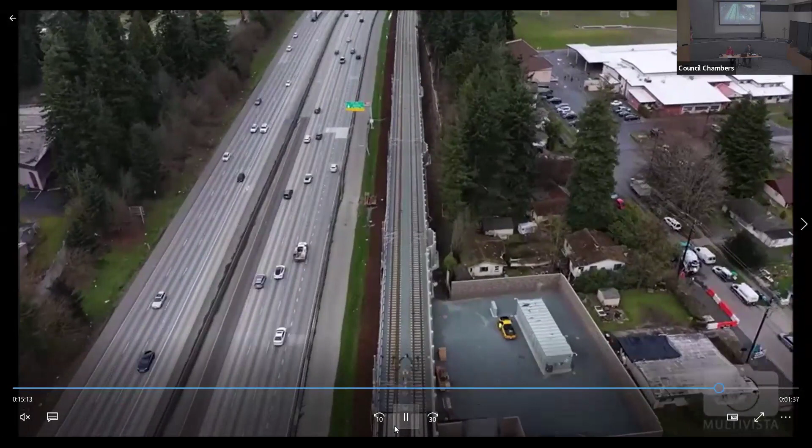One thing I'll point out about this station - having walked it for the first time recently - is it felt like it was done. You'll get off the train there, or get on the train there, and it feels like you're in a community. Not all the stations do that, but we try to make that happen when we can, because we want to create more community around these. If everybody's using them, then naturally some of the issues people have with light rail tend to not be as strong. So it's going to be a really cool station.

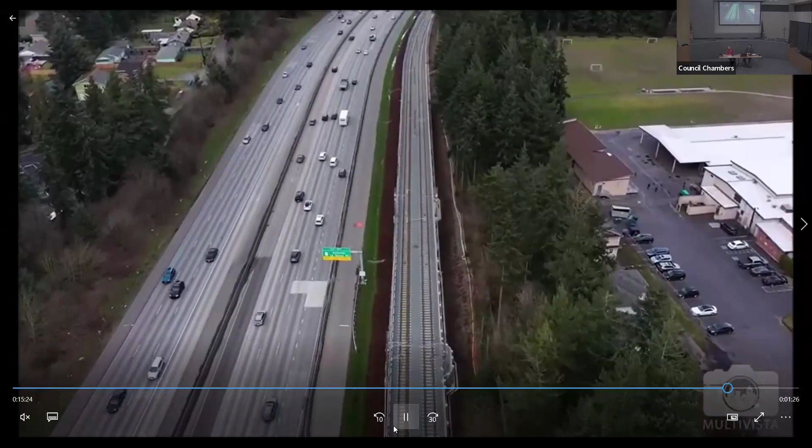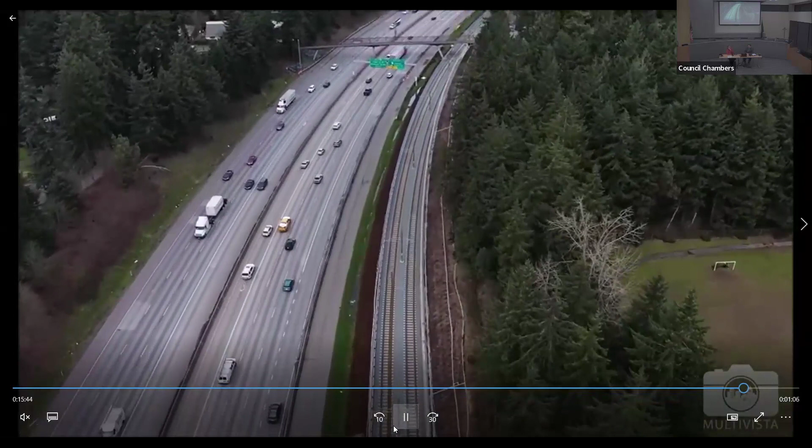Here comes the microphone. With light rail and the buses, like Metro, Sound Transit, etc. - do they have some kind of transfer, like a bus transfer within a 2-hour window? Do they do that? Because last time when I went to Northgate and came back from U District, when I got to the bus they told me we're 2 different systems, we don't do transfers. So I just tapped my ORCA card again.

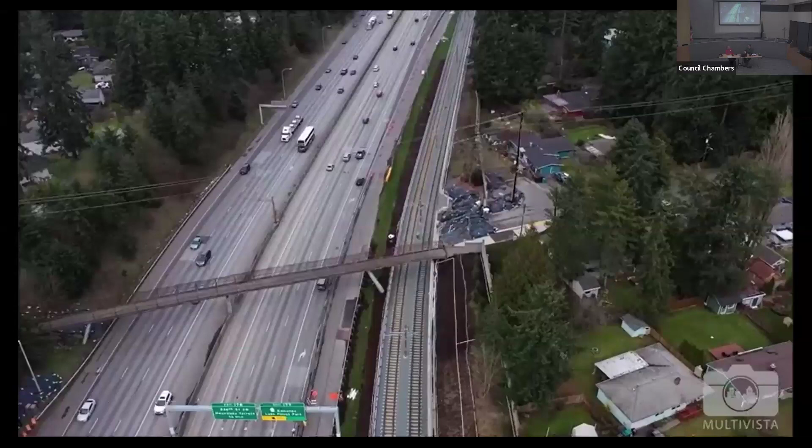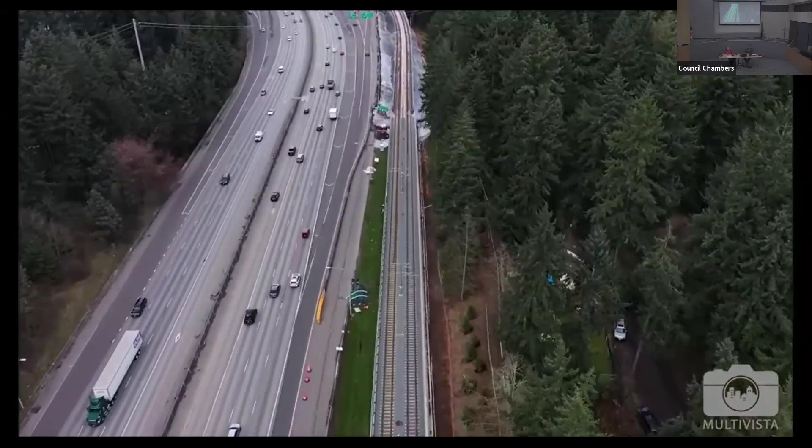I don't know what happened. A common problem is when you get on light rail, you're supposed to tap on and tap off. I did. Okay - because a lot of times people tap on, don't tap off, then go to transfer and it gets confused. It sounds like you had a different issue. We've been moving towards one card to streamline it, but it's just that the driver may not know that. Maybe when I tap again they never charge me because they know, but she said 'you gotta pay, we're 2 different systems.' Well, I'm not the expert on how the fares work.

Over the next several months, we're going to be reaching out to the neighborhood associations - mine was pinged on this, so I'm hoping some folks showed up because of that. We're going to be doing smaller meetings like this with people who do the ORCA cards, signing people up for ORCA LIFT if they need help with that.

There's a lot of work that has to be done between now and when we open this thing to get everybody ready. I want it to be as easy as possible for everybody. So part of that is getting out in the community and talking to folks that are interested, and listening. So I'll make sure that next time we have that, the city helps us get it out.

The bus driver knows. And also maybe put it on your website more clearly, because I tried to find exactly - if you go to the Metro bus, transfer between buses is very clear, within 2 hours you can go. But on the light rail website, they don't have it clearly stated that you can transfer. That's something I think the agencies have been working towards. I couldn't speak to it with authority of what exactly the system looks like in terms of where the transfer points are. You probably should, in the future, put it on the website so people can see it.

I do have an online question. Just a second here.